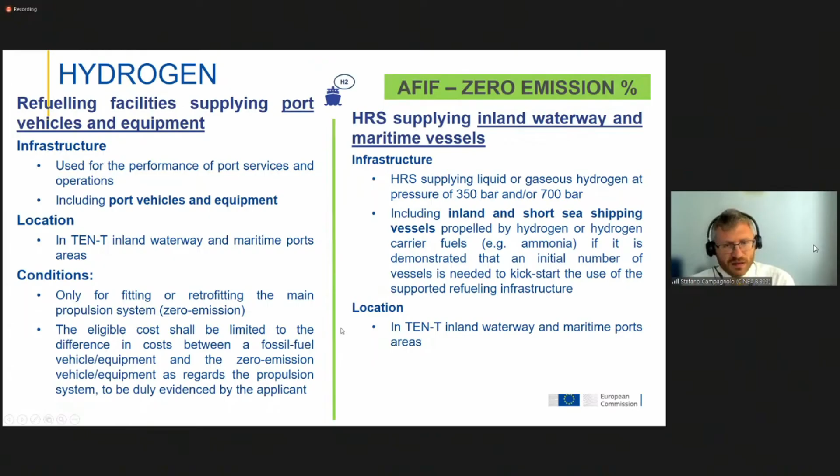Namely, only the difference for vehicles is eligible, only if necessary for justifying the business case, with eligible costs being the difference between conventional vehicles equipped with fossil fuel and zero emission vehicles.

For LNG, which is of course a mature and transition fuel, the co-financing rate is lower. Storage and bunkering vessels are eligible within this priority, and priority will be given to actions demonstrating a progressive uptake of bio-LNG, which has lower emissions than conventional LNG.

And this is the end of my intervention because I don't want to enter too much into details. You can find all the information on the CINEA website. I invite you to contact the agency and the European Commission through the normal channels in case you need further clarification, as well as to follow, if you are thinking to prepare an application, the frequently asked questions, which clarify even better the possibilities and technicalities of the call.

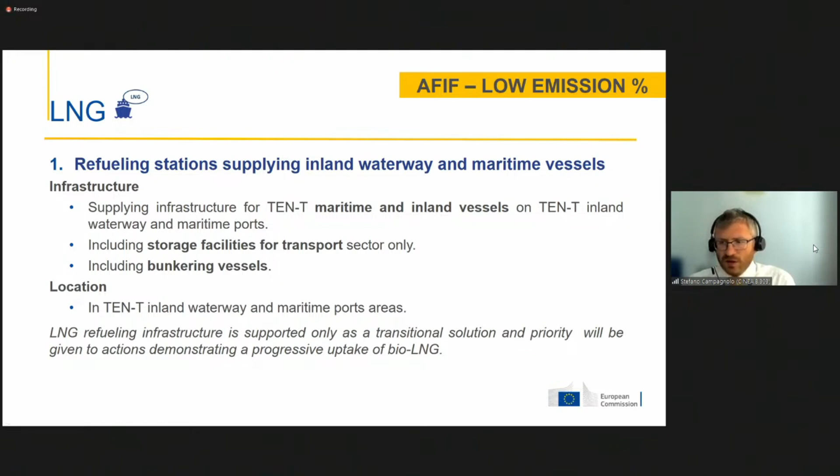Thank you very much again, and I'm looking forward to the next speakers to have more insight on the development of the case studies and on the work done. Thank you very much. Thank you very much, Mr. Campagnolo.

We have now concluded with the speakers, so I will open the floor for discussion. I don't know if we have any questions in the room or through our online participants. In case we do have questions, please just raise your hand and we will bring you a microphone. For online participants, kindly put your question in the chat and we will read it aloud. No? So everything was clear?

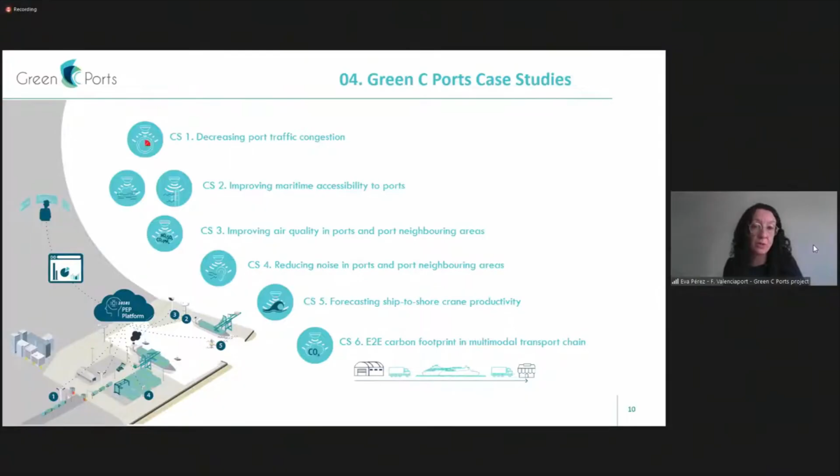All the ports in the consortium are interested in these six case studies. We have divided which port is going to do what, in order to model specifically the conditions in that port, check the validity of those predictive models, and then be able to expand to all the other ports that will be interested, while minimizing the resources needed.

There are also pre-existing systems, like the truck database and information coming from our port community system concerning the customs database and the terminal operating systems of the different terminals, which give us crucial information about the trucks that are going to enter and leave the port depending on the needs of the vessels calling at the port in the following days.

All this information is an input for the port environmental platform, and the results are predictions on how many trucks per hour will leave and enter the port in the next 24 and 48 hours, and mitigating congestion. This information allows the Port Authority to mitigate congestion and the levels of pollution and accidents caused by it.

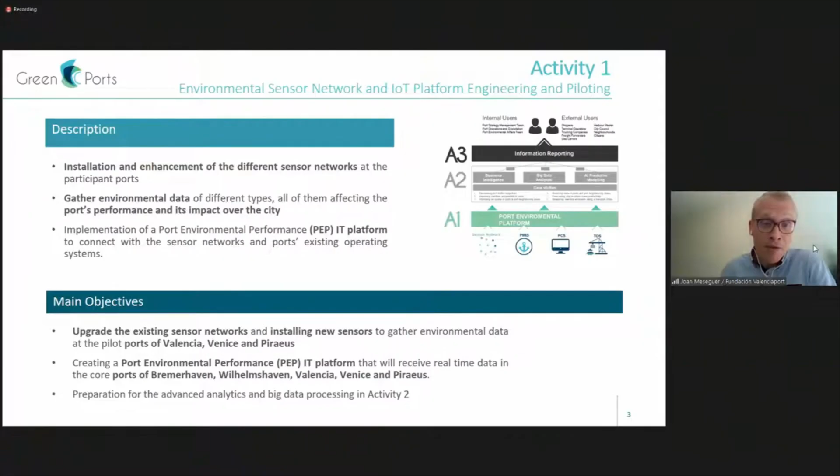So, as mentioned, we will upgrade the existing network of sensors in the ports of Valencia, Venice, and Piraeus, and we will actually develop the PEP platform in the ports of Bremerhaven, Wilhelmshaven, Valencia, Venice, and Piraeus. This prepares us for Activity 2, which is currently ongoing and involves mainly the development of the analytics and big data processing.

So Activity 1 is composed of 6 tasks and 5 milestones, which follows the typical structure of an ICT project. It starts from the definition of IT requirements. Then we proceed with the installation of sensors following the requirements defined before. And then in parallel, we also implement the port environmental and performance platform. Of course, we need to integrate the sensors with the PEP platform, so this is done in Task 4. And then we define the validation plan so that finally we can check that the data is properly sent to the PEP platform and stored.

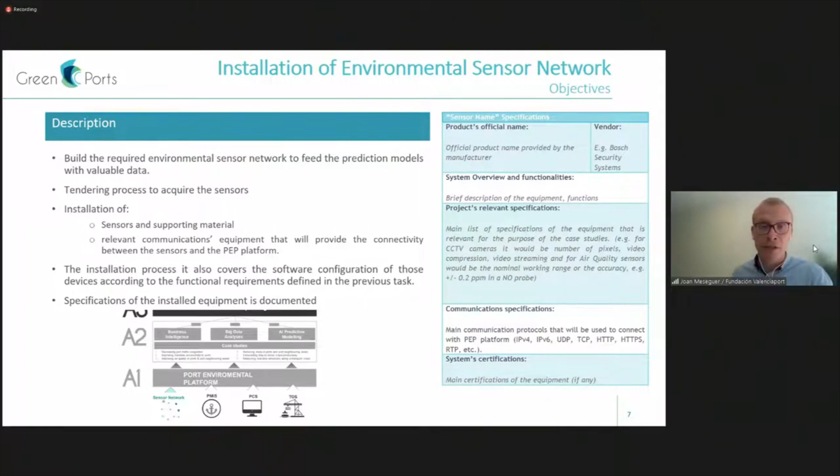And again, here, in order to document the work done, we used a common template that grabs the main specifications of the sensors and equipment installed under the scope of activity 1 in this task.

So, as mentioned before, the Green C Ports project has a strong Internet of Things component, which starts with the installation of 69 sensors to measure port environmental related data.

Then, in parallel to the installation of sensors, the development of the platform started, and the main objective is to develop an IoT platform with big data and artificial intelligence capabilities that allows us to collect the data from the sensors installed, but also from other systems, like mentioned by Eva before.

Like the port community system or the terminal operating system. This allows us to have as much data as possible in order to develop the analytics and the machine learning models to alert, inform, and report the end users with the impacts on a future basis.

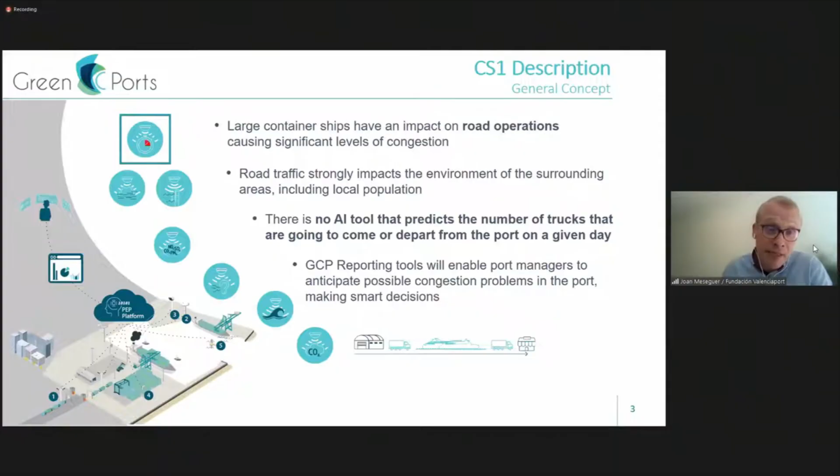So the way we would like to avoid this or minimize the impact is to develop an AI tool, which we don't have at the moment, that is able to predict the number of trucks that will arrive to the port in short term or medium term. This will allow us to develop a reporting tool that will alert port managers about potential congestion events, so that smart decisions can be taken to minimize the impact or avoid these events.

So how are we going to do this? Well, we started by the installation of 8 innovative cameras that are able to measure the traffic congestion in certain critical points of the port, especially at the entrance of the port and the terminals, and also in those points where potential bottlenecks can occur.

Apart from the installation of these cameras, we develop predictive models able to predict the number of trucks that will arrive to the port, but also the congestion events on these critical points. Then, thanks to this development, we will be able to apply simulations to see the impact of applying certain actions, and analyze how this congestion can be reduced and how CO2 emissions are reduced in consequence of reducing the congestion.

Finally, the reporting modules will be developed as well in order to report the port managers about potential congestion events in the future.

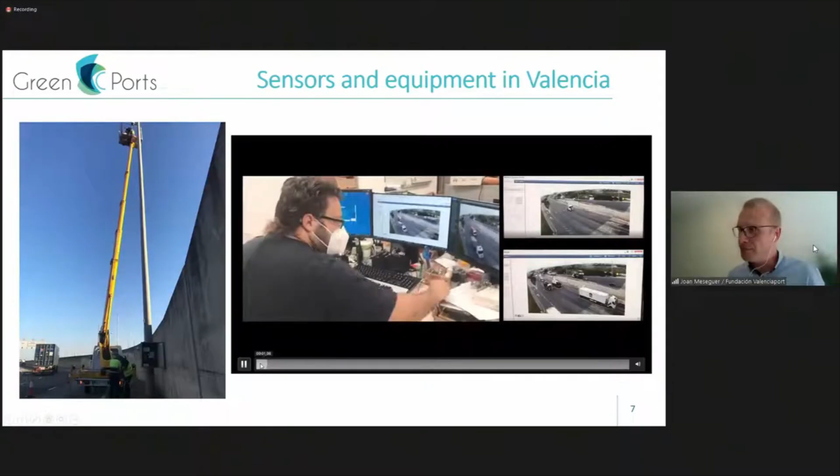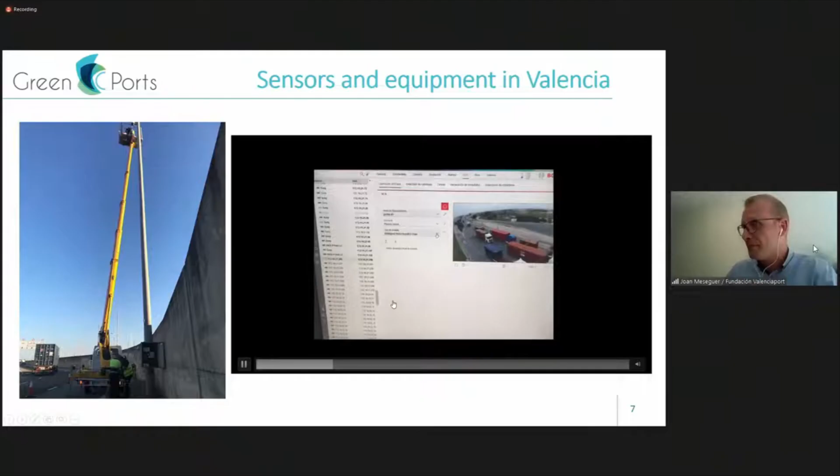You can see the Genetec system, which allows us to see how the cameras are detecting the objects, the trucks. The system allows us to configure some parameters of cameras, like thresholds of number of trucks.

PI system is a suite of software products used for data collection, historizing, finding, analyzing, delivering, and visualization. Data can be automatically collected from many sources through the PI interface and connectors. This PI connector sends the data to the PI Data Archive, which collects, stores, and organizes data from data sources. The definition and representation of organizational assets and the creation of digital twins are performed by the Asset Framework.

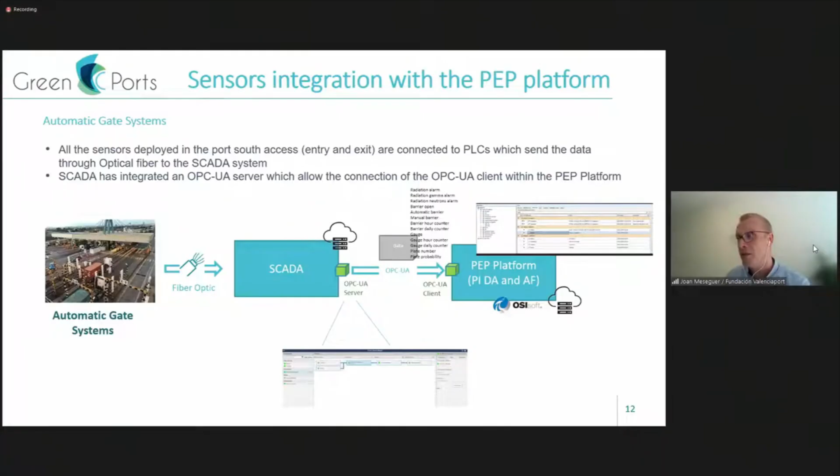Basically, the data transferred from these automatic gate system sensors includes radiation alarms, barrier open status, and gauges to discriminate between trucks and light vehicles, etc.

Then we have also integrated air quality sensors in a different way than the two previous ones. In this case, air quality sensors provided and installed by Inerco in the Port of Valencia send data to their cloud platform via 4G connectivity. Then in this cloud platform provided by Inerco, the validation and final tuning of the data is done.

We have an HTTP connector that publishes data in real time, gathered from the sensors, to our middleware. We have a middleware implemented also in the infrastructure of the PI system, which translates the data from the sensor format to the format necessary in the PI system.

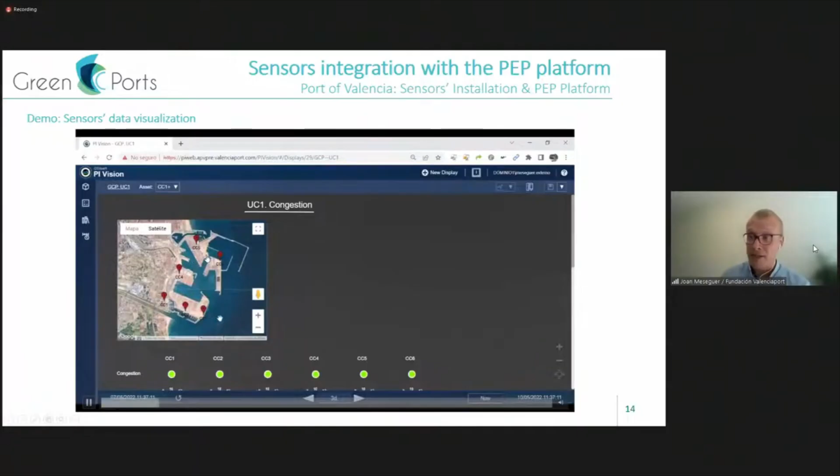So here we have created several dashboards, and this one is for the case study. You can see at the top the actual location of the sensors. Here you can see only six of these cameras, because two of them are under maintenance. But you can see in real time some of the parameters they are giving, for instance, the congestion levels on a traffic light basis - green, yellow, and red - which gives us the level of congestion at these points, and also the real-time values of the number of trucks detected at this moment.

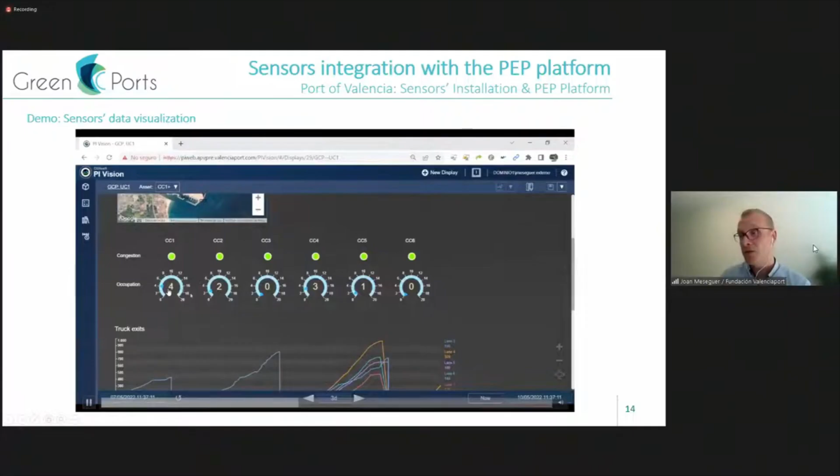Here we also used a velocity gauge, just to see the maximum number of trucks that are good or are under, let's say, congestion level.

Then we have here a time series chart where you can see the number of trucks being counted along the day for each of the lanes at the south access of the port. Here you can select one of the lanes and a time range to see the actual values for each lane.

Here we have also a table where the main events from the south access are being collected, and you can see the actual events, which mainly means the trucks that are going across these gates. And here we have also added the weather data, which can be used as a kind of correlation with previous charts in order to see how meteorological data can affect the number of trucks entering and the throughput of trucks within the port.

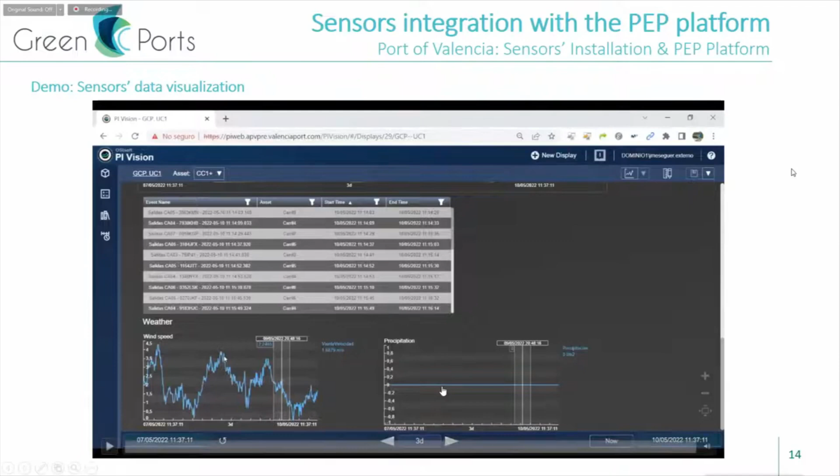And as I say, this dashboard has been created within the PI system using the PI Vision tool. And that's all for case study 1. Thank you.

Thank you so much, Joan. I suppose you won't be feeling better after two presentations. So sorry, sorry for that. No, you were great. Thank you. So before going on to the next case study, I would like to inform the online participants that there is a chat available under the YouTube channel. So if you would like to submit your questions or comments on the subject, feel free to do so.

So I'm continuing to case study 2, improving maritime accessibility to ports. Although we do have Mr. Paolo Menegaso here, who is head of unit of strategic planning and development of the North Adriatic Sea Port Authority, he will be available to cover all technical content and questions. However, the presentation will be done on his behalf by Cecilia Volpato. Cecilia is part of the team of strategic planning and development at the Port of Venice. She has been running for more than 20 years numerous R&D projects. She's responsible for the management and monitoring of the technical implementation. Cecilia, the floor is yours.

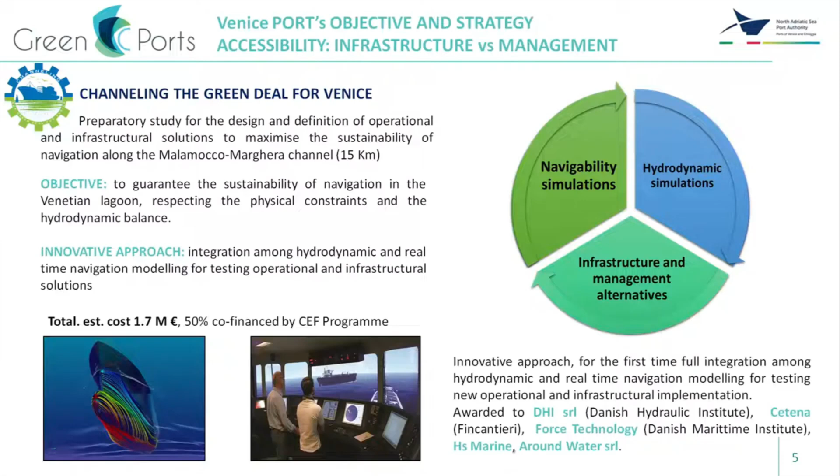The entrance to the Port of Venice is guaranteed through a channel, the Malamocco-Marghera channel, and as every port channel, it needs to be continuously maintained. This is why we started this project, Channeling the Green Deal for Venice. It's a CEF project co-financed by European funds. Its objective is to reach, through a very innovative approach, the design of an infrastructural solution for a long-lasting way of maintaining the canal, with as little environmental impact as possible. It is innovative because it combines navigability simulation, hydrodynamic simulations, and infrastructure and management alternatives. The study has been awarded to a consortium of enterprises led by the Danish Hydraulic Institute, DHI.

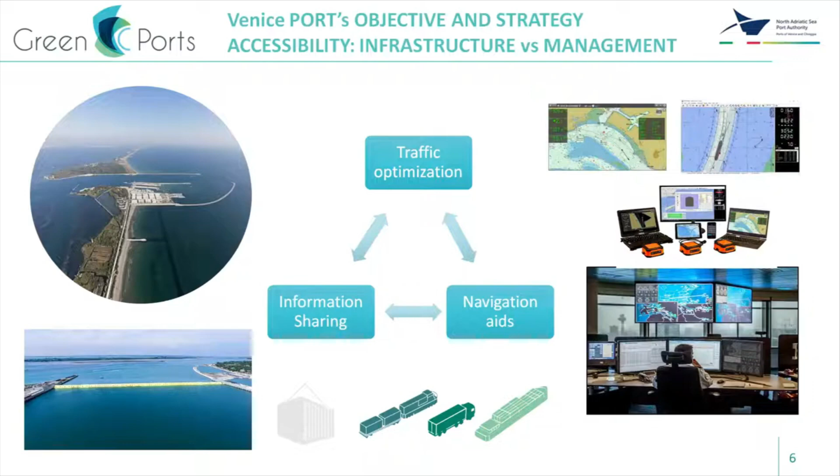So the accessibility, maritime accessibility, is a problem that can be solved with an infrastructure solution, like the Channeling the Green Deal project I was talking to you about, but also with a management solution, like a system for traffic optimization, information sharing, and navigational aids. And this is how the Green C Ports project fits into this situation.

So maritime accessibility for us is like a wall. It has to be built with bricks. Brick by brick, we build maritime accessibility. So here you have an example of what these bricks are.

We have new port cartography that has been upgraded with the DIGLOC project, another European project. Sensor networks up and running with the Green C Ports project. Framework agreements, weather forecast data, data exchange in MOSE operation, the MOSE system I was talking to you about again, thanks to the Green C Ports project.

All these bricks will bring us to the most complex and most relevant output, which is a just-in-time concept. It's a concept right now, but hopefully it will be a project. It's under evaluation right now by CINEA and is led again by the Valencia Port Foundation.

So the bricks of the Green C Ports project have the objective to improve port performance, the strategy to improve scheduling of ships' arrival and departure slots. The tool will be the optimization of ship traffic based also on weather conditions and real-time forecast. The requirements are meteo stations, real-time data sharing, and weather forecast.

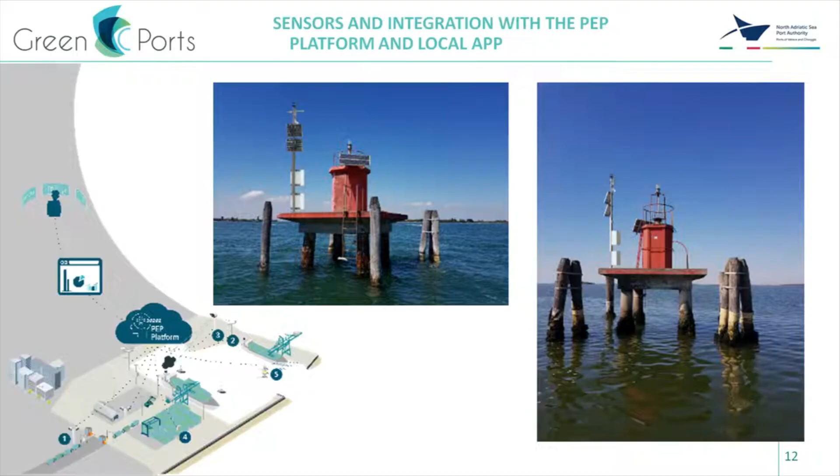And so now we go to the PEP platform, which is already working. It integrates and manages all data coming from the sensors, not just the sensors of the Port Authority, but also those put in place by the Venice municipality. They are managed by the Venice municipality for their own scopes, but the data are also sent to the National Coast Guard for other purposes, such as managing vessel traffic.

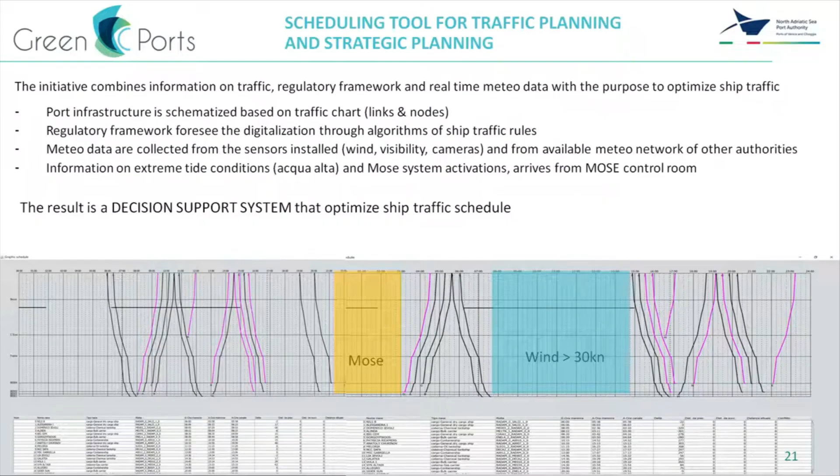Inside the infrastructure, which cannot be moved, we need to put and play with all the other occurrences - MOSE barrier, wind, any other occurrence that we cannot control but need to try to forecast. In this way, we will be able to manage and plan the traffic, but also plan other further strategic investments and improvements in our port.

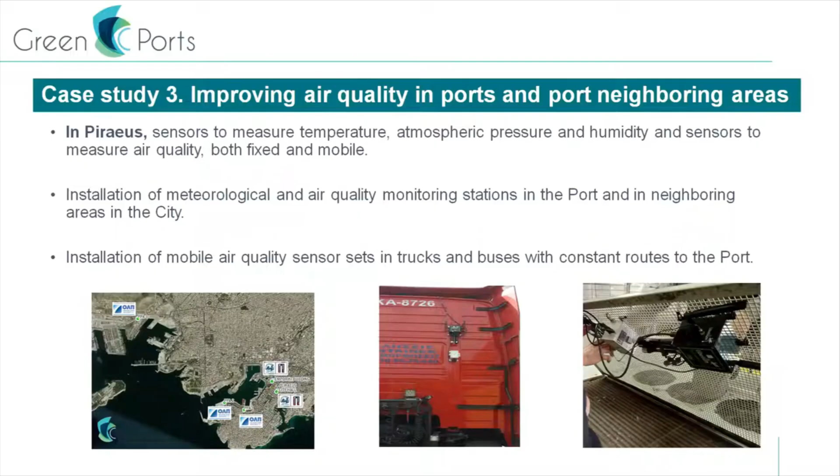What we have done here in Greece is work with the Port of Piraeus, the municipality of Piraeus, and Zen Travel and Glomar, who have installed mobile and fixed sensors and meteorological stations to measure temperature, atmospheric pressure, humidity, and air quality, both fixed and mobile. You will see here several applications in the port and city area, and of course in the trucks and buses.

Going into more detail, we have installed 3 sets of sensors to measure meteorological data, and the municipality has installed 2 additional sets. We have also installed 7 sensors to measure air quality, measuring mostly NOx compounds, nitrogen dioxide, carbon monoxide, sulfur dioxide, and particle matter PM2.5 and PM10. We have also installed 2 sensors to measure noise level.

That case will be explained after the lunch break. The municipality has also installed 2 additional sets of air quality sensors in the city, and finally 8 additional mobile sensors - 2 are still under construction - also measuring these emissions and ozone.

So here you see how they have been distributed in the port area, with a picture of the installation. Here again, a little more detail on the whole set of parameters we're measuring at the moment.

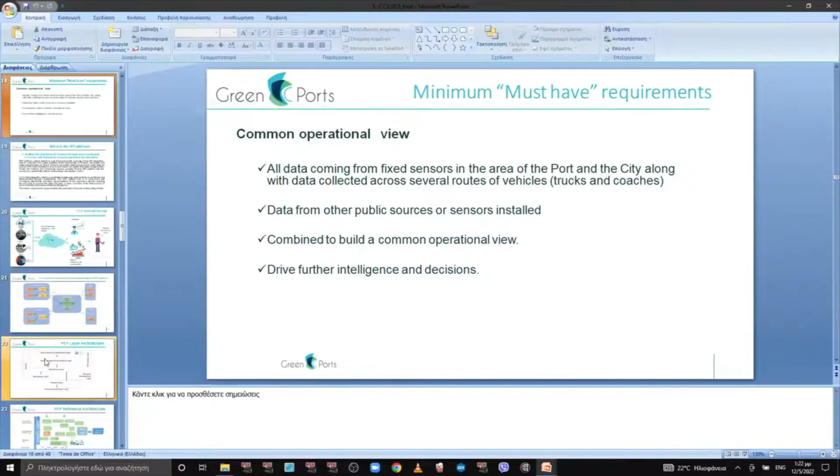Sorry for that - from the installation in the municipality.

No music here. I'm muting it because you never know what a Greek guy may say, so it's better if you don't hear anything.

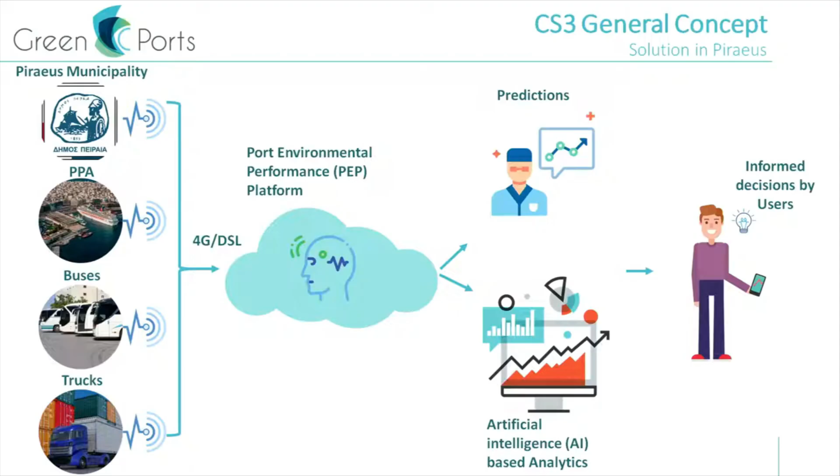A small representation of the overall architecture, simplified as much as possible for the audience to understand. We have the sensors, the Symmetron cloud platform, and the Arequal cloud platform for the air quality sensors - 4 data sources fed into the data integration layer of the platform, with 2 supportive layers: one with the predictive engine currently under development, and the data visualization layer which you'll see.

As explained before, we've used a meta-architecture approach to assure agnostic integration, so that this solution will be interoperable and can be integrated with any other legacy system without further development needs. I'll skip this since it's already there for you.

As you see, we have several IoT devices - sensors and stations - and through an adapter, they're fed into the Piraeus PEP platform. The predictive engine is developed so that end users receive what we have developed: a tested and validated platform, which my colleague Katerina Georgiou will demonstrate to you in a couple of seconds.

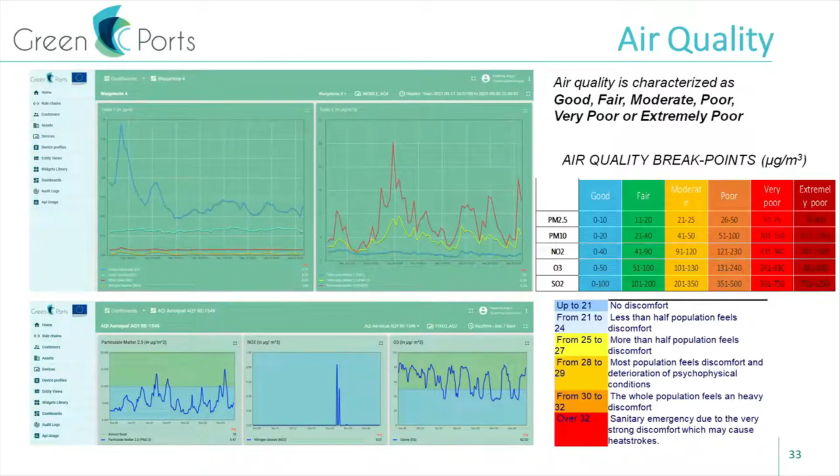And now we can see a video of the platform. So, logging into the web application...

The user, by clicking devices, sees all the devices available to access. By clicking on every device, there's a download button, as we said before, that the user can use to select which sensors of every device they want to download data from. They have to select the date range for the data they want to download.

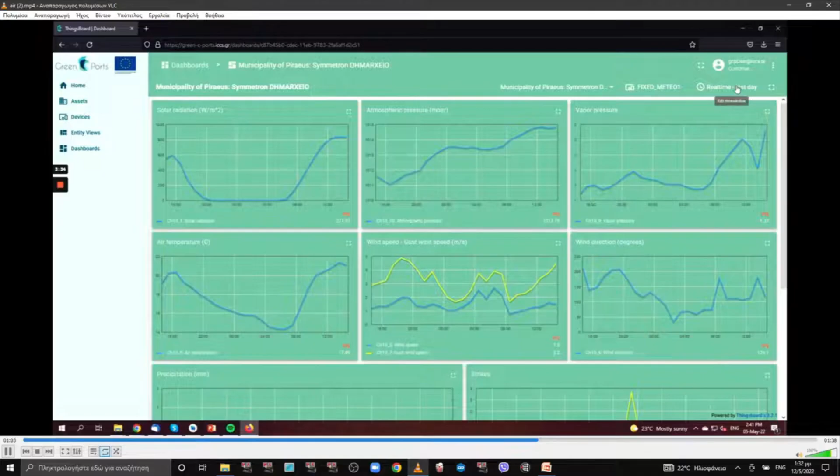Here you can see that there's a timestamp at every measurement of every sensor. And in the dashboards, for every device, there's a dashboard that shows every graph of every sensor. The user has the ability to click on every graph and see in detail the measurements and the data. They have the ability to see real-time data or even historical data, and select which dashboard they want from the user interface.

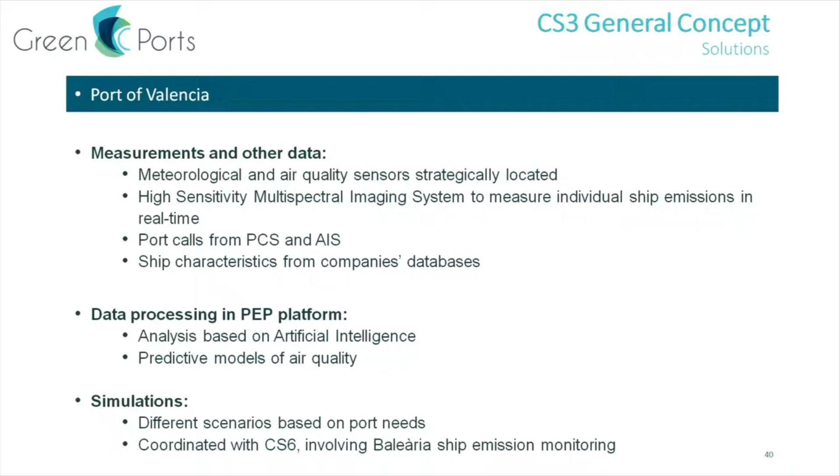We also have port calls, ship AIS data, and ship characteristics, which is all then combined and included into the PEP platform. All this data and information included in the platform is processed there, and this is done in two ways.

One way is through analysis based on artificial intelligence, and the other is through air quality predictive models. This allows us to evaluate different actions to minimize the environmental impact of port operations on the city by simulating different scenarios based on, for example, wind, number of port calls, etc. It's based basically on the port's needs.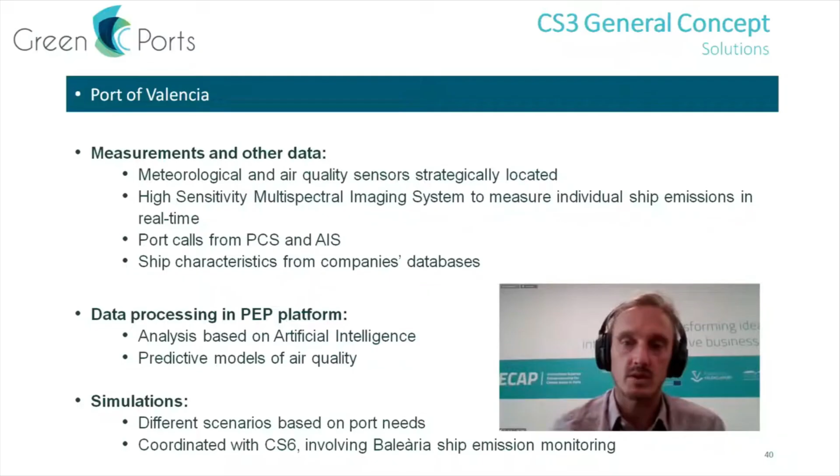In relation to case study 6, we can also simulate the impact caused by different vessels using specific fuels, together with the Baleària shipping company.

The info and data gathered is sent to the platform via FO, DSL, and 4G networks. Data processing is performed within the PEP platform, which provides predictions and artificial intelligence-based analysis, producing reports and suggestions to users—meaning shippers, freight forwarders, shipping companies, sea carriers, city council, neighborhoods, and citizens.

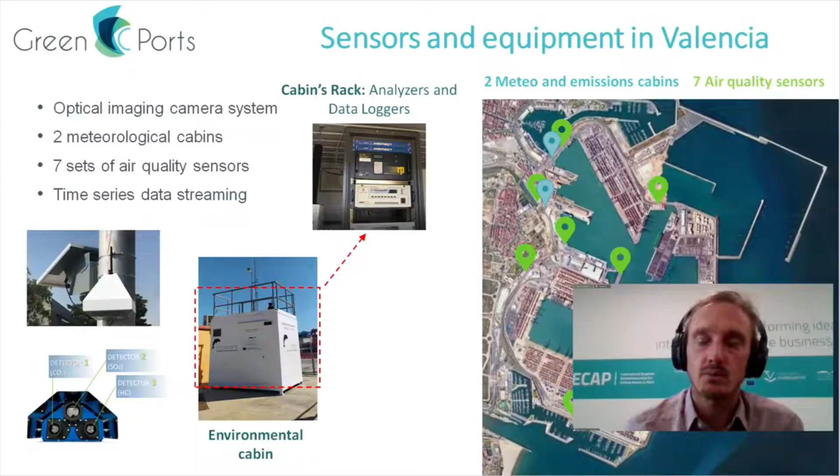We have also installed 7 sets of air quality sensors, shown in light green, strategically positioned in areas such as entrances, exits, and port-city boundary areas, to quantify the boundary between the port and the actual city. We also have the optical imaging camera, as mentioned earlier—here you can see the different images for each one. Next we have a brief video of the equipment and part of the setup.

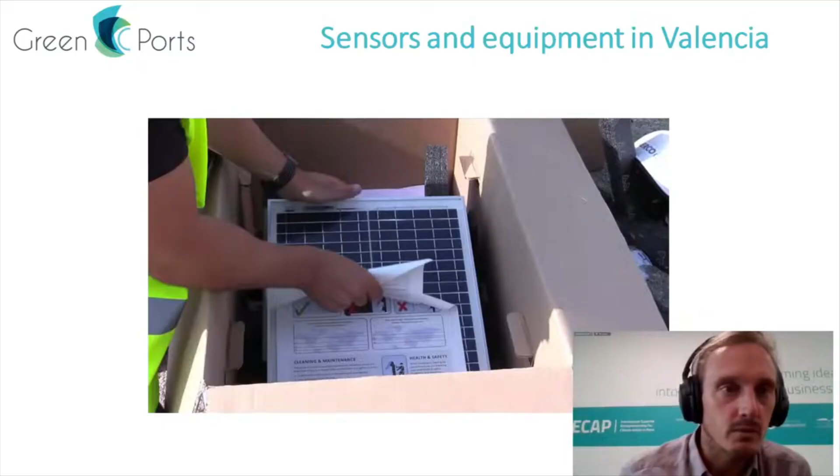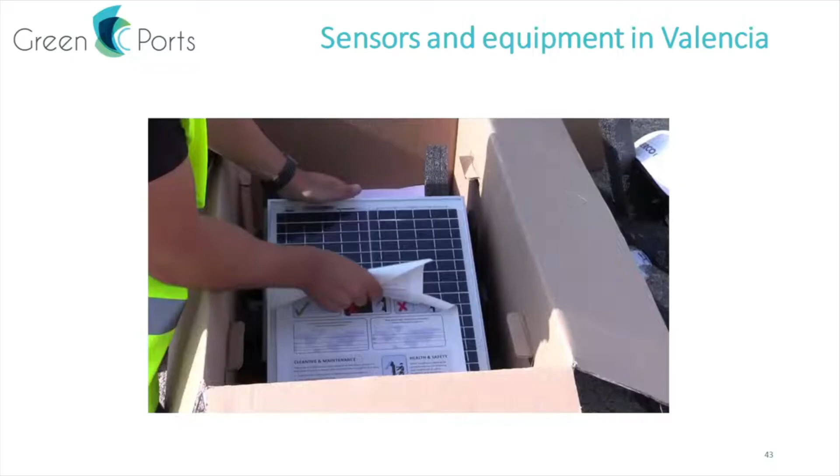Can you press play? I'm not sure if I can see it. Mark, I'm not sure that... does it work? Not really. Okay, hang on. Shall I move on? Or you can show it from your side. Hang on, let me see if I can get it. One second... Mark, would you like to share your screen and show the video from your side? Yes, that's what I'm trying to do. Sorry, Dimitri, can we do that? Okay, thank you. Yes, Mark? Yeah, okay. How do I share it on Zoom? I'm sorry, I'm not too familiar with screen sharing. Compartir pantalla, okay, one second. Can you see my screen? Yes, we can.

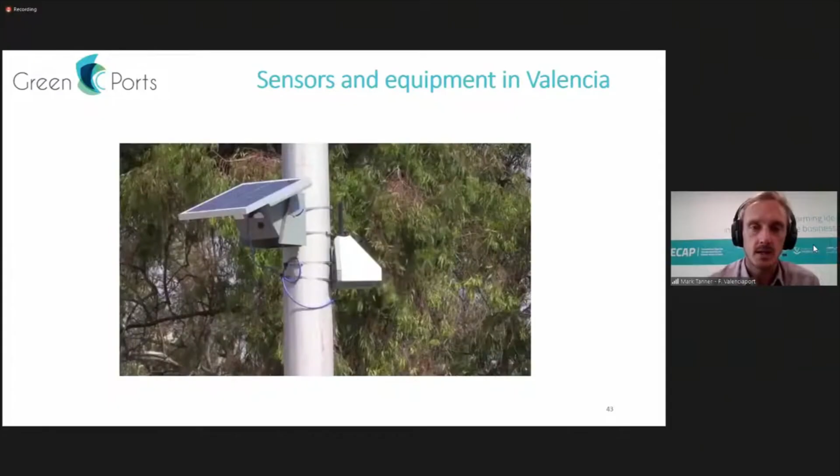Yes, it's playing, thank you Mark. So here it's the air quality sensor setup. It's got a solar plate, and you can see the operators here just installing them on the different poles or lighting through the port. As I said, there are 7. This is the meteorological and emissions cabin, which has the analyzers inside and the data logger. Two of these are installed in the port, providing connectivity to the PEP platform.

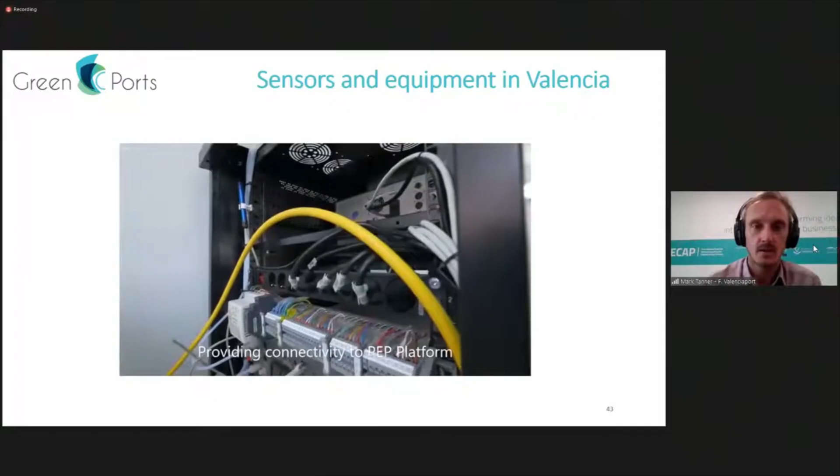And then we'll move on to the actual camera, which is portable, so campaigns can be carried out through different areas of the port. It's specific to monitoring individual ships coming in, leaving, or which are berthed and operating.

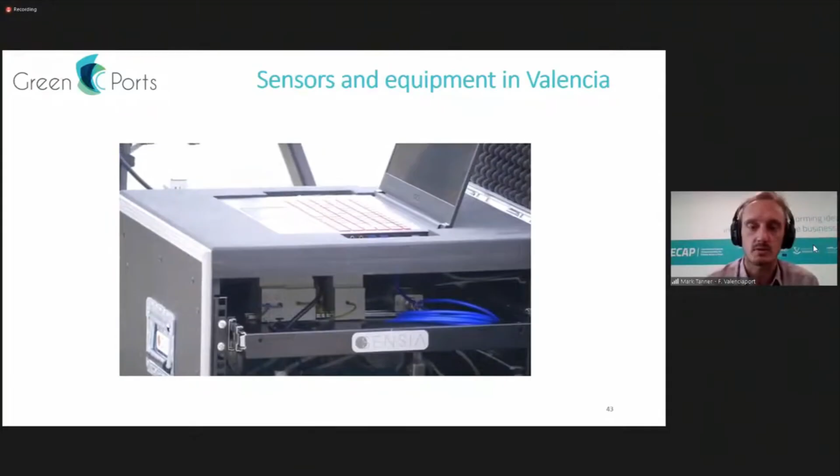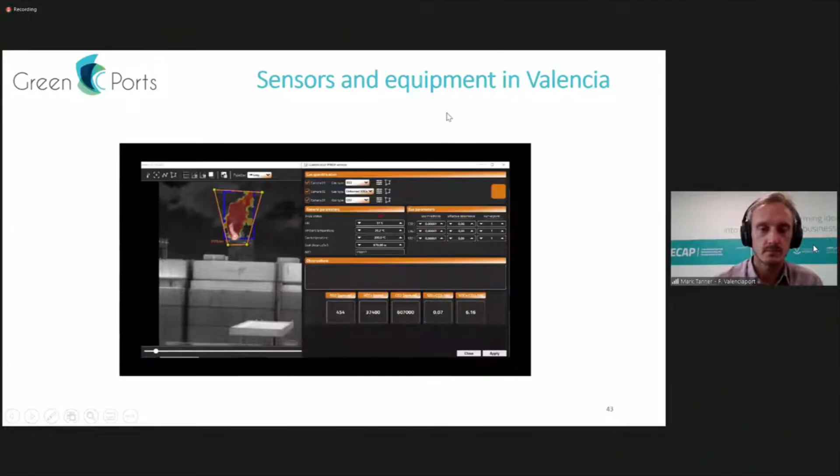Okay, I think that's it. Can you continue sharing your one? Yes, thank you. Can you see it? Yeah, I can see it only small there. Hang on.

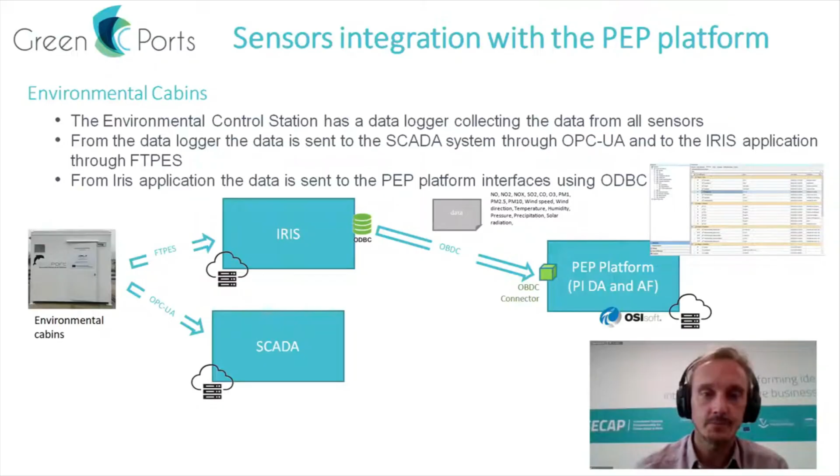The data it sends includes different gases, wind direction, speed, temperature, humidity, etc. On the right is a screenshot of the PI assets framework where the cabin sensors are shown. Very similar as well. Well, the next one actually.

Now to finalize, we have a video showing the assets framework of the PEP platform, which allows us to see the different signals coming from the sensors.

Yes, you can. Can you play it? I don't think I have this one. I'm playing it. Oh, okay. Sorry, I can't see. Okay, great.

Okay, so on the left you can see the list of sensors and systems integrated in the platform. Through this interface, we can individually navigate through the different sensors, for example the optical camera.

Here we can see the list of parameters, timestamps, and the same for the other sensors, which is the air quality and the cabins. You can see the parameters and timestamps there as well. It gives you a date and time for each recording.

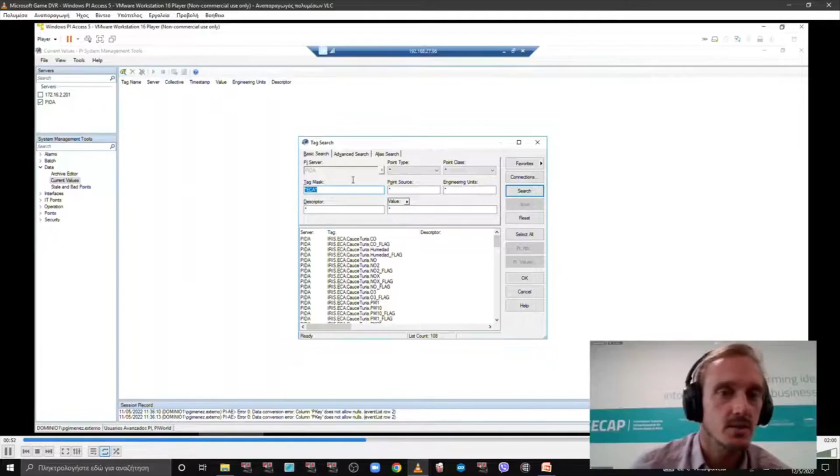There you can see the seven, there's one for each of the sensors. Now we'll navigate through the data archive in a minute.

Now we'll navigate through the data archive, which is the streaming database of the PEP platform. Here you can see the latest values for the signals that we saw previously.

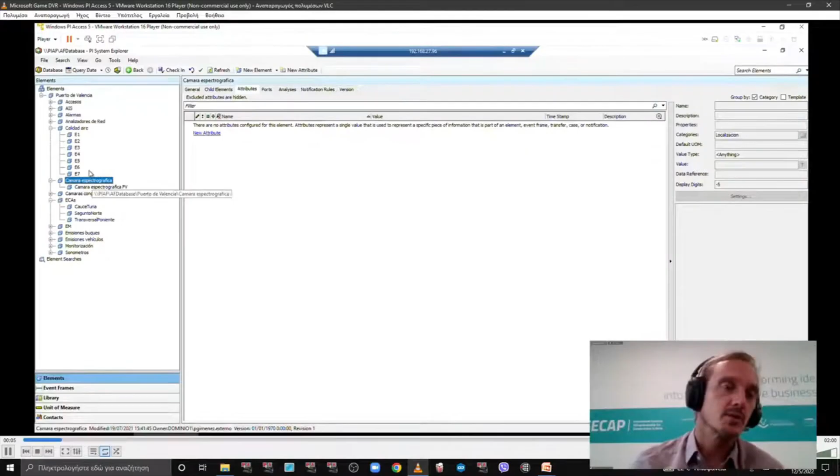The dashboard allows us to zoom into the different graphs as well. Oh sorry, it's okay, that's finished now. Yeah, so the graph, as with the others, you can stop that one now. That's the last of the video. It's playing again.

Now, what I was saying to finish off is that the graphs allow you to visualize the latest data, and they allow you to zoom in to analyze in different ways and so on. So thank you for that.

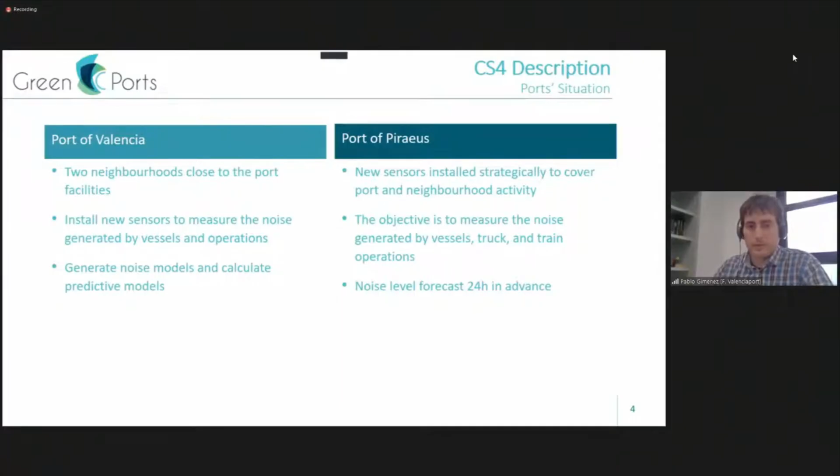In the case of the Port of Piraeus, it will be similar. They have installed four new sensors strategically to cover all the port and neighborhood activity. Similar to the previous one, the objective is to measure the noise generated by vessels, trains, trucks, and all operations in order to forecast the noise level 24 hours in advance.

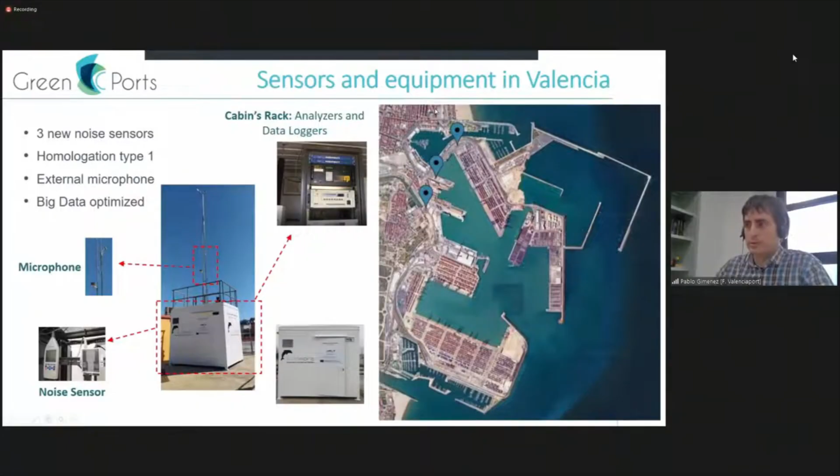Let's move to the case of the Port of Valencia. You can see here in this picture the three new noise meters that we have installed. They are inside these cabins, and we have a pole in order to install the external microphone. Inside we also have the data loggers and all the communication equipment needed for sending the data. You can see here in the map also the locations. They are in the interface between the port and the city, because as I said, we have these two neighborhoods that are close to the port, and we want to measure the impact from the port.

I'll explain in more detail how we integrated this sensor. The sensors are connected to a data logger, which gets the data and manages it, sending it to the SCADA system through fiber optics using the OPC UA protocol. In SCADA, we have another OPC UA server, which through the OPC connector sends the data to our PEP platform. The data from the sensors includes equivalent noise and the maximum and minimum noise levels. Within the PEP platform, we have a database with all the data stored, and we also have data available from the noise meters' digital tools.

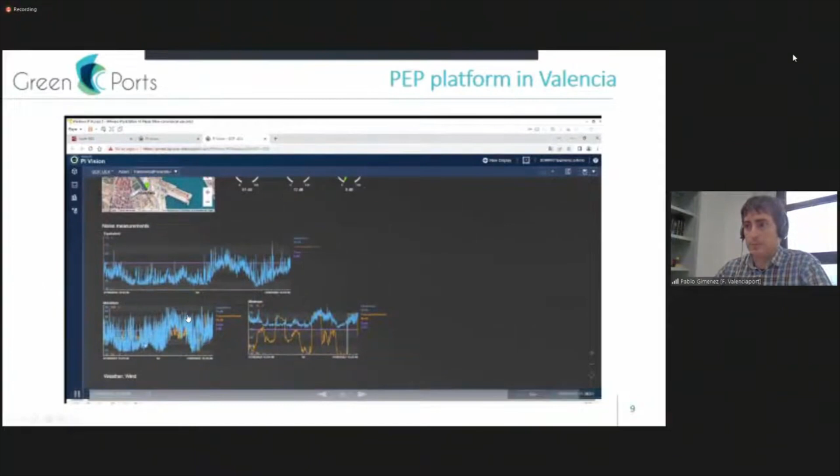We also have historical data from these sensors, for instance the equivalent level of noise. We can select one sensor if we're interested in only one, and see the data in more detail. We also have information about the maximum and minimum noise levels from the three sensors.

Since wind can affect noise propagation, we've included in the same dashboard information about the environmental control stations. You can see here the real-time wind speed and direction, and also historical information, in this case from the last three days. That's all for the deployment in the Port of Valencia. Let's move on now to the Port of Piraeus.

Thank you, Pablo. Maybe you want to share your screen, or I can. You can go on, it's okay if it's okay with you.

We have set up and installed in the area of the port 4 micro noise monitoring stations equipped with meteorological sensors, as mentioned before.

What we are currently measuring are the Lden and Leq parameters, 12 parameters in total, which we get and compute along with historical data received from the port. We've developed an intelligent mechanism for distinguishing noise sources by taking into account noise levels in different ranges and frequencies. We'll also use vessel traffic data that we're anticipating, along with predictive algorithms, so we can have 24-hour forecasting for noise levels.

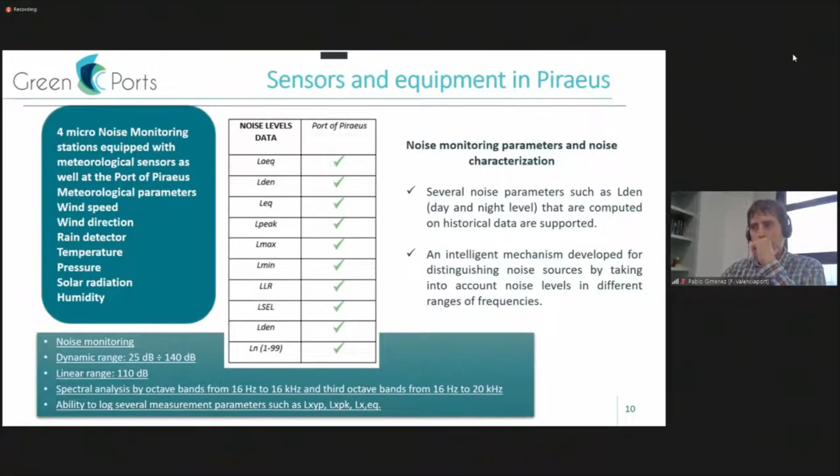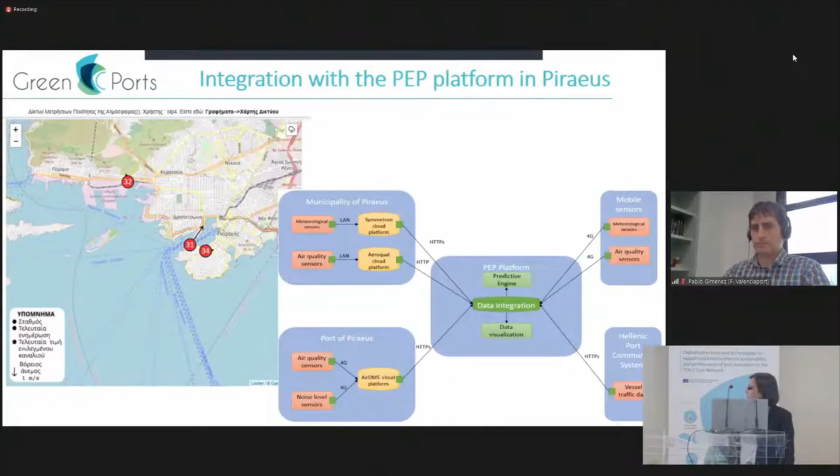You can see here the several dashboards that the platform represents. The data flows to the PEP platform coming from the mobile and air quality sensors, and the external noise sensors are depicted here.

I think we can move on to the final one, which is the video, Pablo. So everybody can see how the devices are listed and what's represented there, along with the noise levels visualization.

You can focus and go deep to see what the levels are and what the peaks are. They can also be exported. I'm not the technical one, Katerina Georgiou is the brain behind this solution. You can zoom in, download, export and import the data, and get any report in real time.

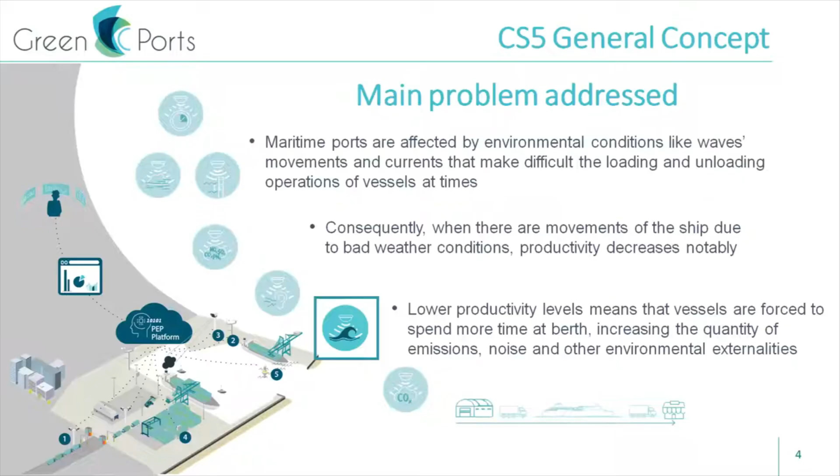The actual situation and outcome, I think you also know this from the morning's presentation. Currently, the digital connection between meteorological information systems and port operation systems is limited, and a comprehensive cross-system link has yet to be created. Because of this, port managers are not able to inform or alert stakeholders in time, and that's one of the problems we try to solve in this case study.

In case study 5, we try to fill exactly this gap by connecting the relevant systems and combining data to generate a productivity forecast for 48 hours, meaning 2 days in advance. The results should be that berth windows can be adjusted, turnaround time is shortened where needed, emissions are reduced, and resources are optimized.

This is also a slide you've often seen in the morning. On the left side we have the incoming information: tide and wave data, meteorological data, and port communication system information. All this information is collected and brought technically into the PEP platform, which is able to make predictions, role-based analytics, and reports and suggestions to the users in the port business.

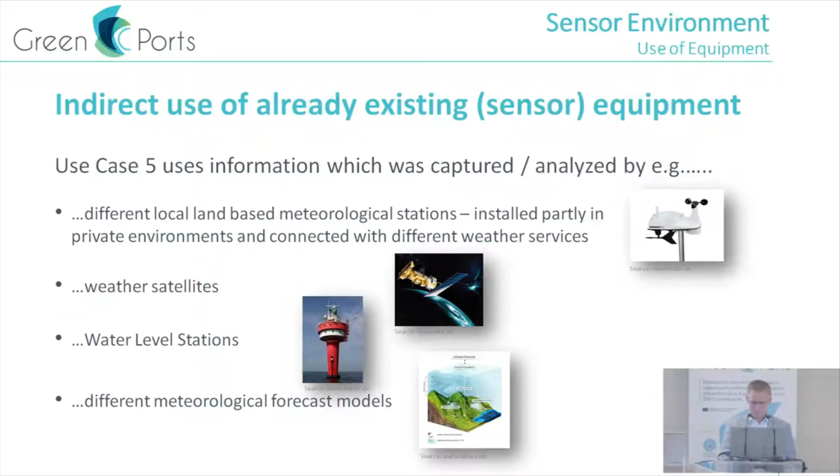So I will go a little bit more in depth on some packages. We have exactly four packages of information we can use for our work in case study 5. The first one is the basic package, which delivers information about temperature, felt temperature, snow fraction, and so on.

The next one is the sea package, which delivers information about wind wave direction, sea surface temperature, wind wave height, and mean wave direction. All this information we put into the system you've seen on screen before. The third is the cloud package, which delivers information about low clouds, mid clouds, and high clouds, all bringing information for the system.

And last but not least is the tide and high water package, which delivers information about mean high water, mean low water, and all this information comes from these packages into our system. So all four packages together give us an advantage by using this environment in case study 5.

So we try here, it's like showing cost savings coming in, because there's no installation required on site. The required weather information data is available almost everywhere through external providers in Europe and beyond, via satellites. It's also possible to have a quick and easy integration into other technical port environments—only an adaptation of the input interface or a change of GPS location is required. And additional weather parameters can be implemented without expensive sensor installation if required.

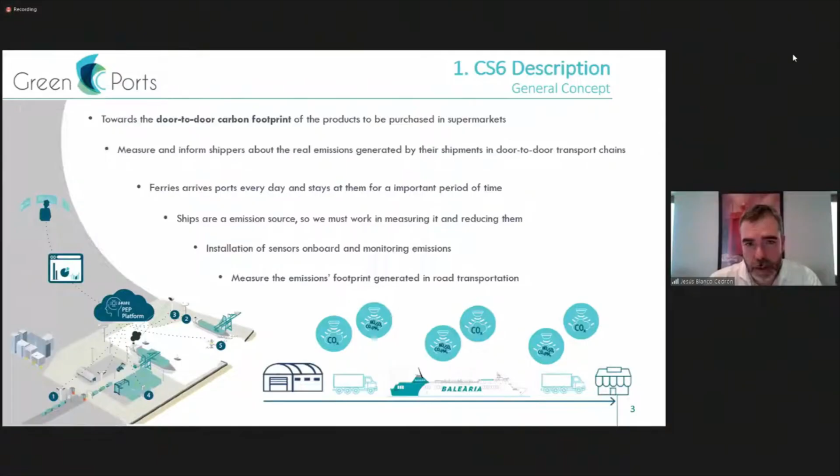In this slide, we want to represent the general concept of the ship sensorization and the data sources that we use. We install on board torque meters, gas analyzers, flow meters, GPS, draft sensors, accelerometers or inclinometers, and we made some integrations with some of the ship's systems, such as bridge equipment and the automation system. All these data sources are connected in a ship platform where all the data is uniform.

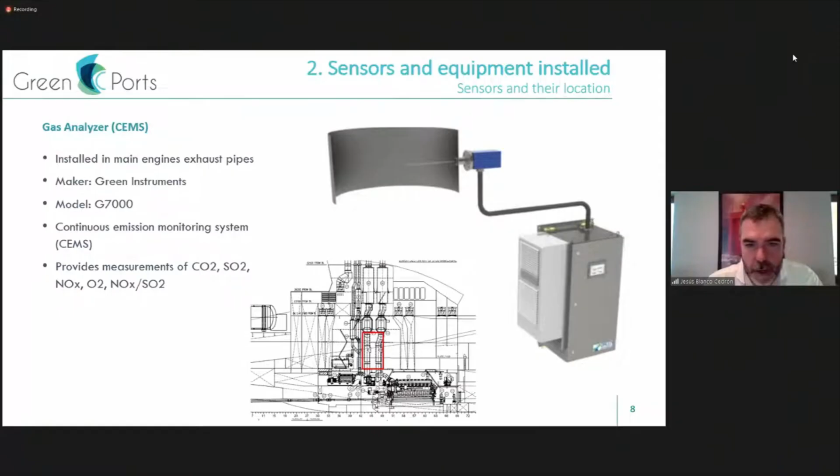Now I'm going to start talking about the sensors that we installed on our vessels. The first one is the gas analyzers, the CEMs, continuous emission monitoring system, installed in the main engine's exhaust pipes. In each vessel the installation is different, as every exhaust pipe or machine space is different. The maker for this equipment is Green Instruments, model G7000. With this equipment we receive real-time emission measurements of CO2, SO2, NOx, O2, and the NOx-SO2 ratio. Here you can see some pictures of the real installation on board the vessels.

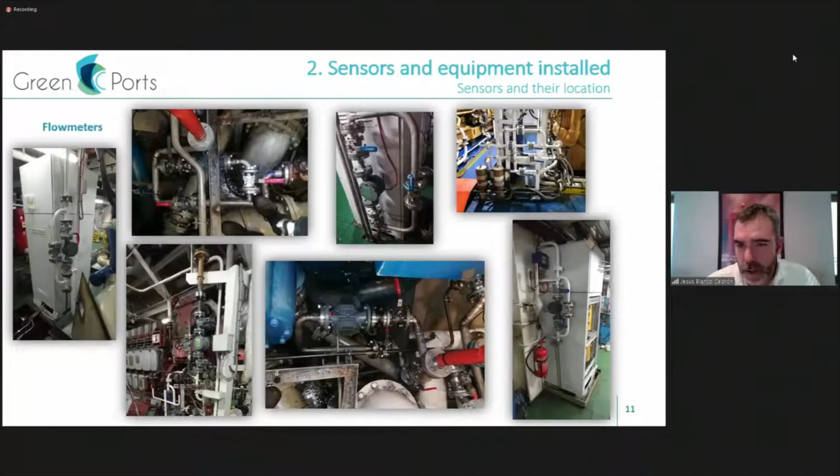For the installation of the flow meters, we need to install a bypass in each line, so if something goes wrong with the sensor or it gets blocked, we can do maintenance on the flow meters without stopping the system or the engines.

We also installed torque meters in the shaft lines, which give us the torque and shaft power, calculating the engine's power at every moment. These are also Vaf Instruments sensors, model T-Sense.

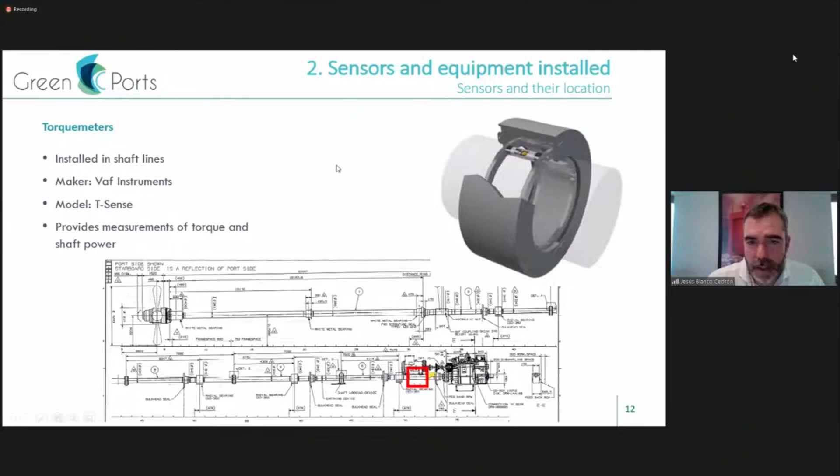Another sensor is the inclinometer or accelerometer, installed on the bridge. The maker is REDCAI, and with this equipment we receive real-time measurements of dynamic trim in combination with draft sensors, as well as accelerations and roll of the ship.

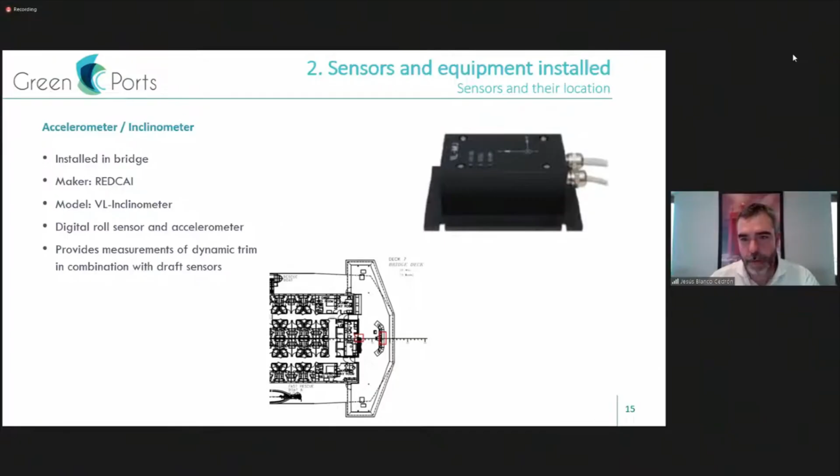And to finalize, the last sensor we install on board is the GPS, installed in the bridge. It's also REDCAI maker, and it's a differential GPS. With it we get the position of the vessel with a precision up to 5 meters of error.

We also made integrations with some systems of the ship, such as the bridge equipment, to have more information about the operation of the ship, such as speed, course, wind force and direction, and with the automation system, to have more information about engine parameters such as exhaust temperatures, pressure, tank levels, temperatures, and all these things.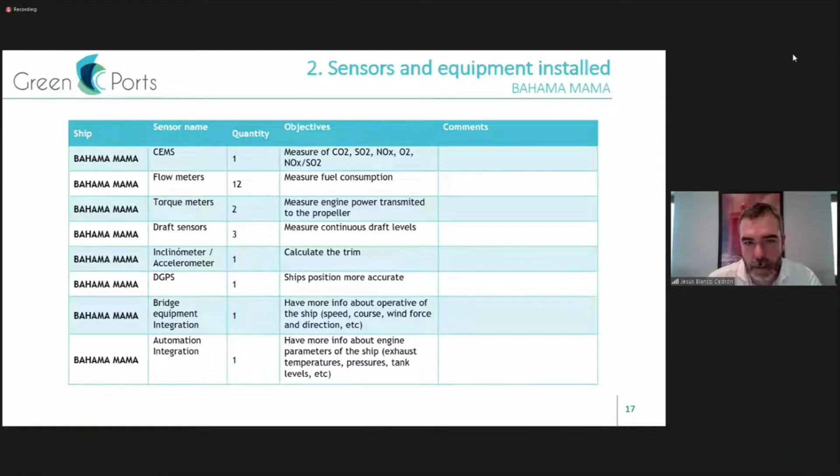Now there are the sensors from the vans. In collaboration with INERCO, Gas2Move intended to install light CEMs in their vehicles. A thorough market search revealed that there is no technology available with the required specifications, mainly in terms of lightweight and low volume, so a new approach was necessary to measure Gas2Move vehicles' emissions.

The emissions from Gas2Move vehicles were measured in the test lab at INERCO under different load and speed conditions. Then those vehicles were monitored during several trips, emulating real-life operation, capturing explanatory data such as speed, acceleration, engine's performance, load carried, as well as real-time emissions. Finally, with all the above results, INERCO modeled the emissions of the vans from indirect data captured in real-time actual operations, acceleration, speed, engine performance, etc., in order to associate emission values to real transport operations carried out during the trial period of the project.

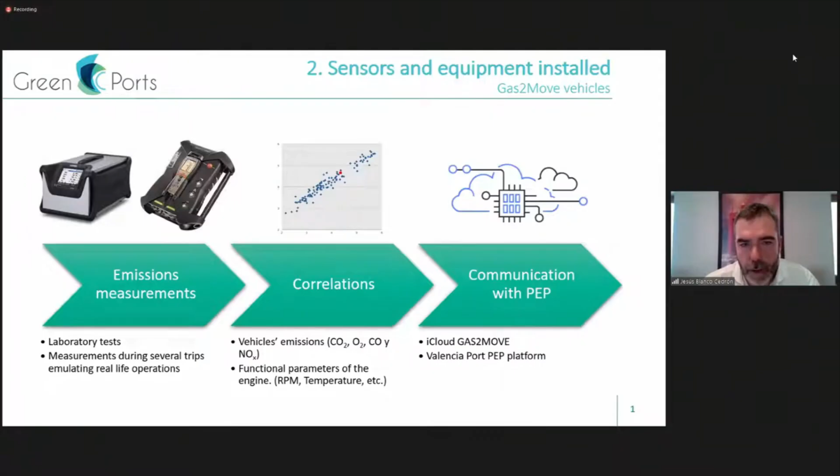Here you can see how Gas2Move and INERCO conducted this test with the emission monitoring equipment and the vans.

Now I'm going to explain the sensors' integration with the PEP platform. I'm starting with a small demo of the onboard platform that is on the ships and how it looks like. Let me start. Let's see if it's working.

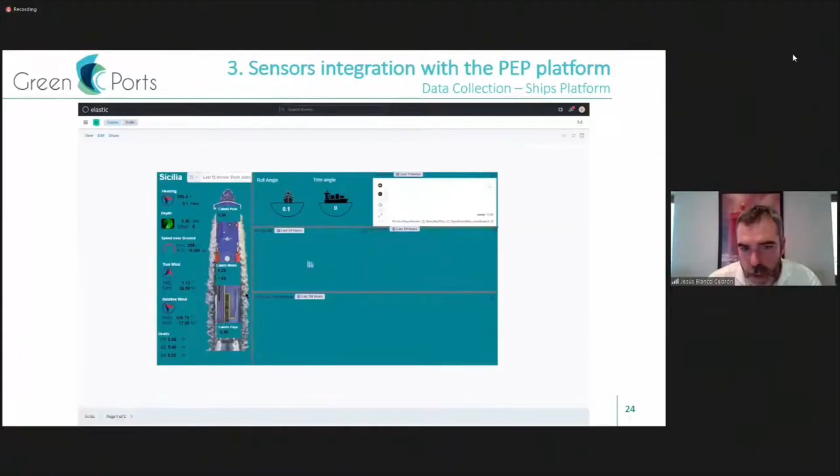I'm not sure you can see it. We are going to see the data of one vessel. We have two different types of dashboards.

The first one is the bridge department dashboard, where they can choose the important information for the captains, such as speed, drafts, trims, roll angle, consumption, and main engine powers. They can also customize the data for the time range perspective.

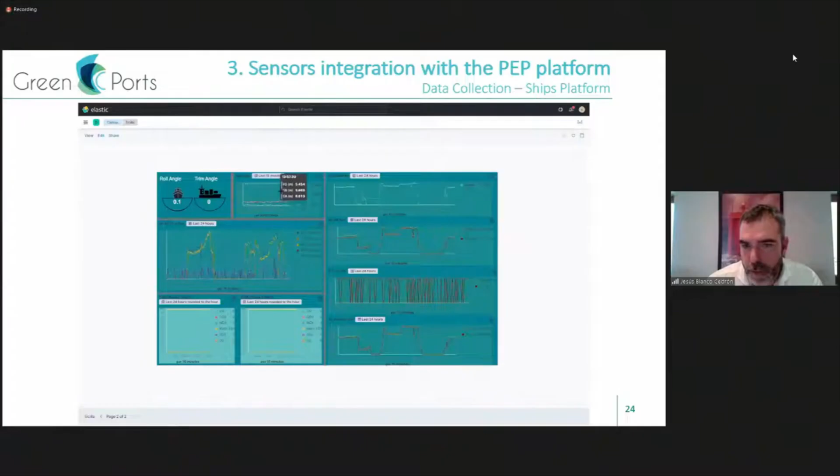This one is the engine department dashboard, where they can see the most important information for the chief engineer: draft, speed, consumption, engine power from main and auxiliary engines, trims, emissions. And then we have also another dashboard

where all the data is in graphics. All the data from the sensors goes inside, and it has a graphic, and you can change the time range, and all the data will update accordingly. So here we can also do some performance analysis and some studies.

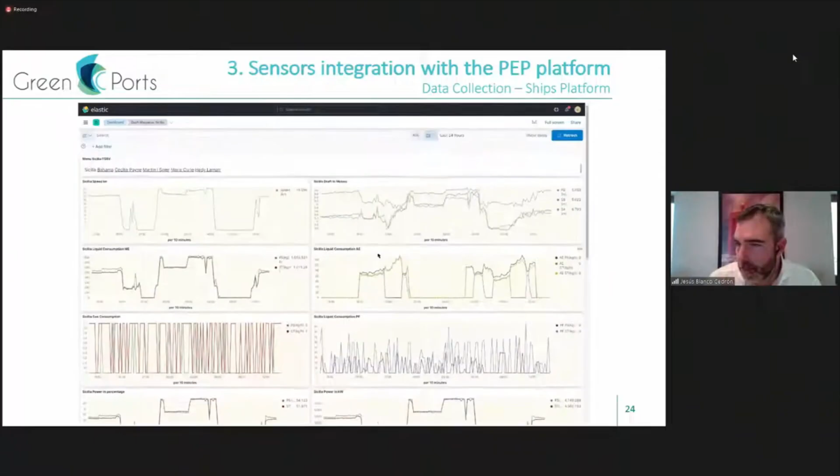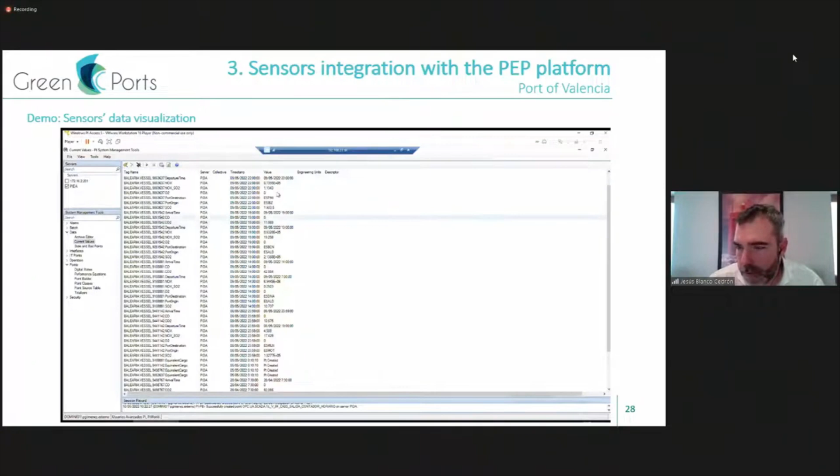And here now you can see the graphics for all the assets, vessels, and vans, of all the information on monitored sites, such as emissions and cargo data.

And well, this is all from my side. Thank you for your attention.

Thank you very much, Jesus, for your presentation. We have now concluded the presentations of all case studies. As you can see, all of them follow more or less the same methodology, but the actual technical implementation is totally different for each one of them. At the end of the day, the outputs are apparent and are expected to support mitigating emissions in ports and optimizing environmental management.

I will go to the last presentation before the concluding remarks. I will invite our coordinator again, Mrs. Eva Perez from the Valencia Port Foundation, to share with us the current status of the project and the next steps to be followed. Eva, can you hear me? Yeah, hello, thank you. You can share your screen.

Great, okay, let me put it in full screen. Can you see it? Yes, we can see conclusions. Okay, correct, perfect. Okay, thank you. Actually, this is going to be a very brief presentation, just to talk about the ongoing work that we are doing, the future steps, and then I'll quickly give you a thank you note.